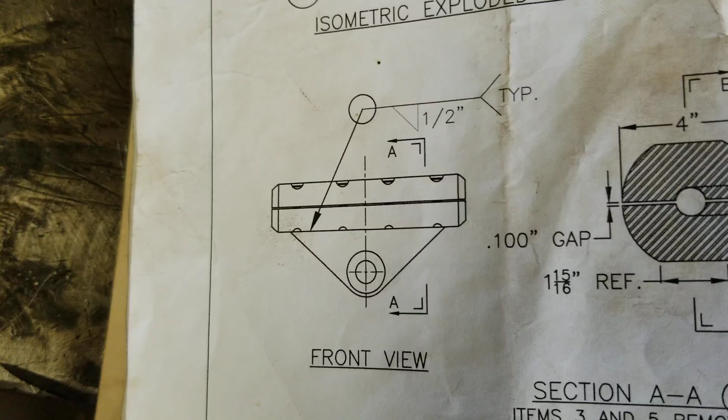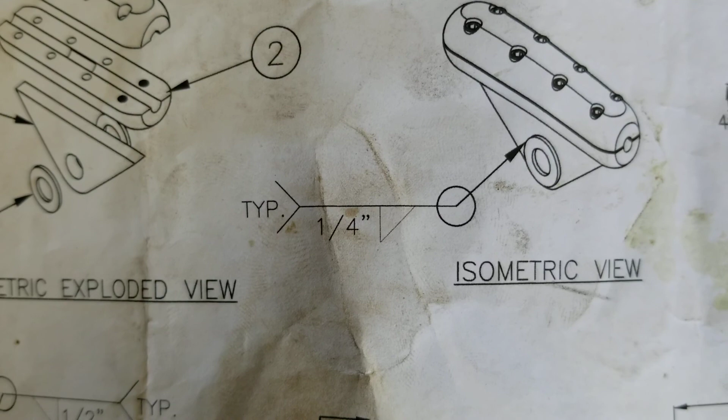Okay, boys and girls, we're going to have class today. You see this drawing? This is the only weld symbol on this drawing other than this one right here. That one's already been done when I welded the collars onto the side. That says typical on all of them, 1/4 inch weld, fillet weld, all the way around. That's what the circle right here around the angle means. So that's what I did here.

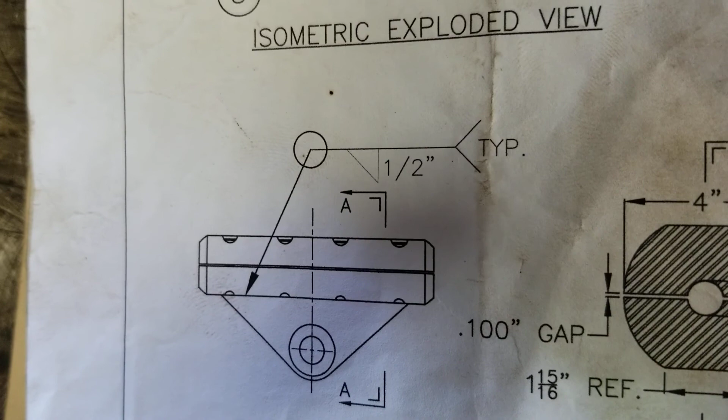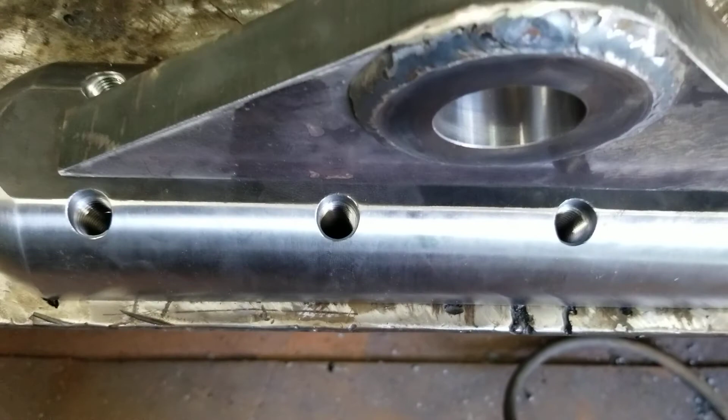Okay, this one tells me that it's typical on all pieces, 1/2 inch weld, fillet weld. That's what your triangle is here. Circle around the point means all the way around. All right, let's go over here to the part. This is the part. They want a 1/2 inch weld here, all the way down here, across this end, and on the back side.

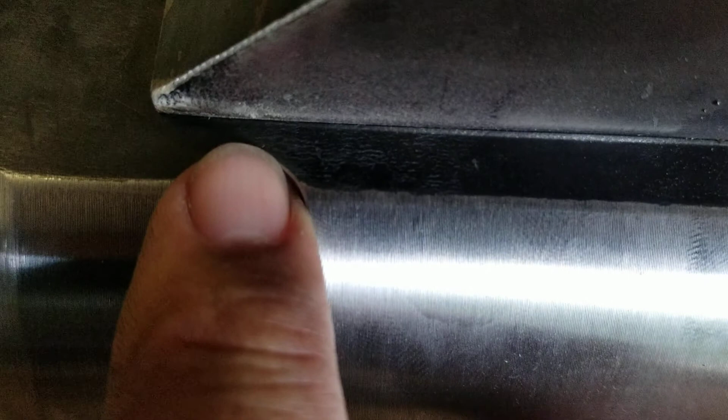All right, I'm gonna get a close-up right here. This space from here to this plate is 3/16 of an inch. The total width of this shelf right here is 3/8 of an inch. All right, so you tell me how you're going to put a 1/2 inch weld on a 3/8 shelf that goes down to 3/16 for where your holes are for your hole relief.

And if you look in that hole, you'll see that hole is threaded. So when I get through welding these, the machinists are going to have to go back with their tap and clean the spatter out of those threads, because those sharp pointed threads will collect spatter.

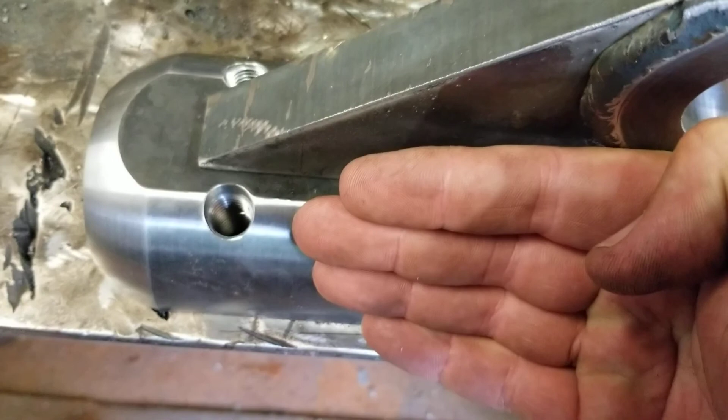So what you need the engineer to clarify, to see what he was thinking, was what is he calling a 1/2 inch weld to go in this location? Is he talking about 1/2 inch across the face of it, which would be the flat part of it that's looking at you? Because that's not what weld symbols mean. If you look at a weld symbol, 1/2 inch is just like I said, 1/2 inch out this way, 1/2 inch up this side. If you've seen my previous videos where I did the slag pushers, they had 1.5 inch welds in them all the way around. That's a big weld, a lot of time in it.

So all I can do is just kind of guess at what the engineer wanted. I'm gonna do the best I can to put him a 1/2 inch weld in there, but I won't be able to where these holes are. I'm gonna have to narrow it down, or else it'll fill that hole up, and the relief of where the bolt comes through will be covered up if I stay in it too long, linger around that hole.

So, boys and girls, for those of you that want to be welders, this is one of the challenges you run into. You do need to know how to read weld symbols. Weld symbols are a very important part of your job. If you don't know how to read a weld symbol, you don't know what the engineer is asking for. But on the other hand, the engineer is a human being too, and they make mistakes. And I'm not really sure that he knew that he made this mistake.